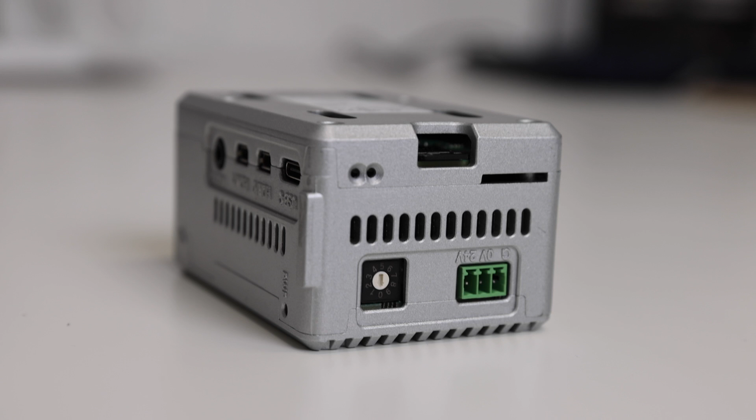On today's video, we're going to talk about a new device made by Synergy Logic, the SL-RP4. This device, despite its size, is a powerful edge computer based on the Raspberry Pi 4. Thanks to its aluminum case, the SL-RP4 can run without CPU throttling and maintain its core temperature, even at an ambient temperature of up to 50 degrees Celsius.

The SL-RP4 can be used as an edge computer to collect data, as a gateway, or even as a PLC. It comes with OpenPLC pre-installed and configured, ready to be used. On the bottom, it has a rotary switch that can be used to read configurations or parameters in your program. This rotary switch can be read using the rotary switch block on OpenPLC editor.

Using the OpenPLC runtime, you can add multiple slave devices to the SL-RP4 to control remote IOs. For our example video, I'm going to pair it up with a P1AM system from Automation Direct. We're going to use the OpenPLC editor to set the P1AM as a generic Modbus slave device, and then link it with the SL-RP4 using the slave devices module. Then we're going to upload a sample traffic lights program to the SL-RP4 and make it control the P1AM as a remote I/O device. Before we start programming our system, we first need to wire it up.

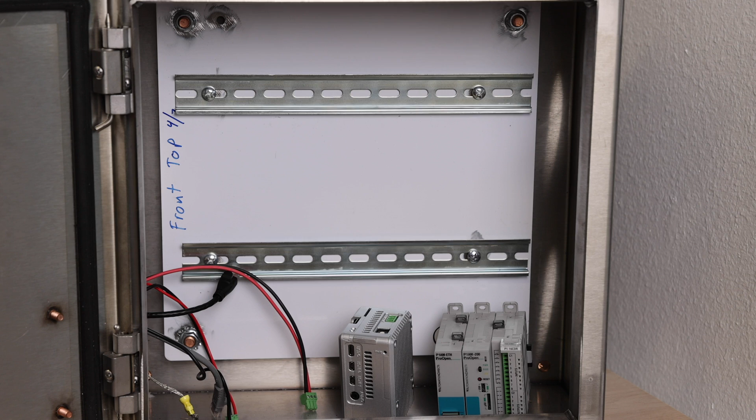So I'm going to start with the SL-RP4, power supply on the top, 24 volts, Ethernet cable on the bottom, and then I can attach it to my DIN rail. I'll do the same thing with the P1AM. Ethernet cable, programming cable, because I also need to program it, and power supply, 24 volts on the bottom. Attach it to my DIN rail. I'm ready to program my system.

Alright, now that everything is wired up and connected, the first thing I'm going to do is configure the slave device. To configure the slave device, I'm going to open up OpenPLC editor. And because this slave device is not actually a dumb slave device, it's actually a full-blown PLC, we'll have to upload a program to it and make it act as a dumb slave device. I created such a project here.

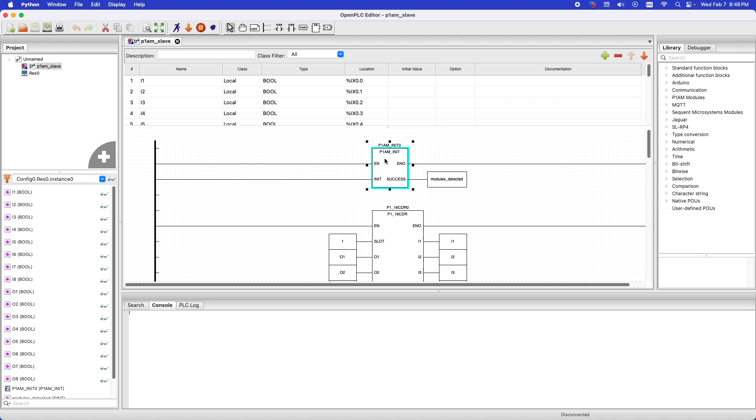It's very simple. The idea is, first I initialize all the modules. This is a P1AM, so it requires the P1AM init. And then I have this P1 16CDR block. I only have one module connected to the CPU. This module has 8 digital inputs and 8 digital outputs, so it's perfect for our example. On this program, I created 8 input variables and 8 output variables. They're all located at Modbus address locations. So I'm wiring up all these variables to the inputs and outputs of this module.

So essentially what it means is that when this device is addressed over Modbus for this particular location, I'm actually addressing that particular output on the module itself. Same thing goes for the inputs. When you're reading inputs over Modbus for that location, you're actually reading the input of the module. Very simple, just this. The program doesn't have anything else besides this. No logic, so it's not actually running any logic here. It's just acting as a dumb Modbus slave device.

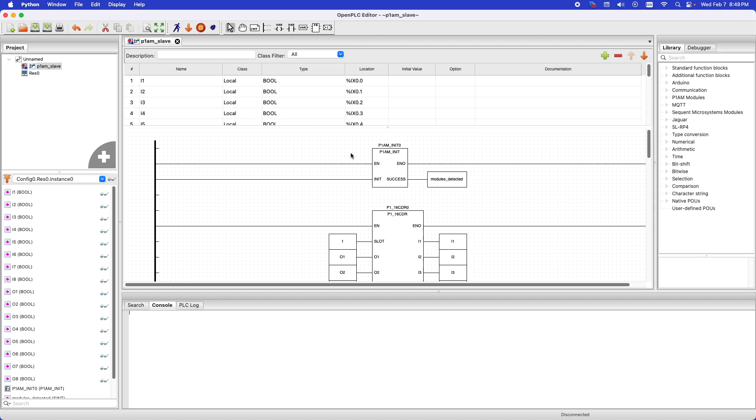So now we're going to upload that to our P1AM. So we have P1AM here. This is the installed version. This is the COM port. Everything is correct. Now, one thing is worth mentioning. The default configuration for P1AM has some GPIO pins that you can use. Those pins are on the left side of the P1AM CPU. We're not going to use those, and in fact, I'm going to remove this so that OpenPLC will not control those pins, so it won't conflict with my Modbus locations that are actually tied up to the external 16CDR module.

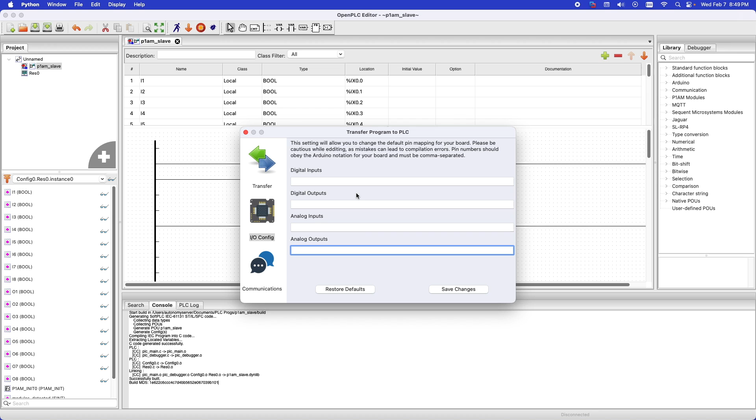And then I'm going to enable Modbus TCP on Ethernet. This is the IP address and gateway. All the IP configuration is correct. So I'm good to go. Just transfer it to the PLC now.

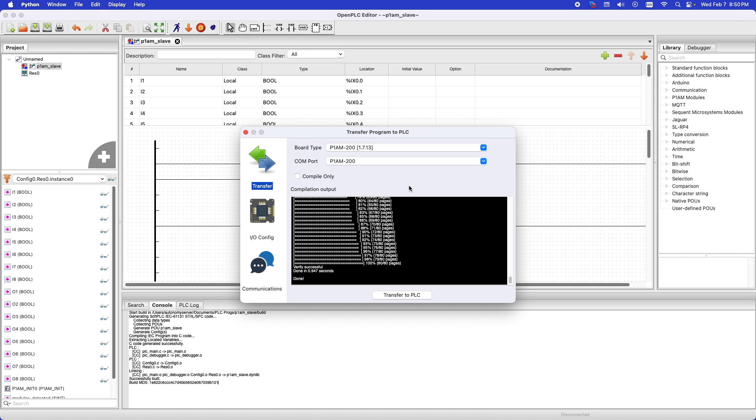All right. Now that the program has been uploaded, we're going to test it before connecting it to the SL-RP4. We're going to test it with Radzio Modbus. I have a Windows machine here running Radzio Modbus, and this is a very simple program to just connect over to Modbus devices. So I'm going to go here and hit connection settings to make sure that I have the right configuration. I'm connecting over Modbus TCP, and that's the correct IP address of the slave device I just programmed.

So I'm going to create a new data sheet here, and I'm selecting coil status, so I want to know the status of the outputs, and I'll just hit connection, connect. So I'm reading the status of the outputs. They're all turned off, and apparently everything is working just fine.

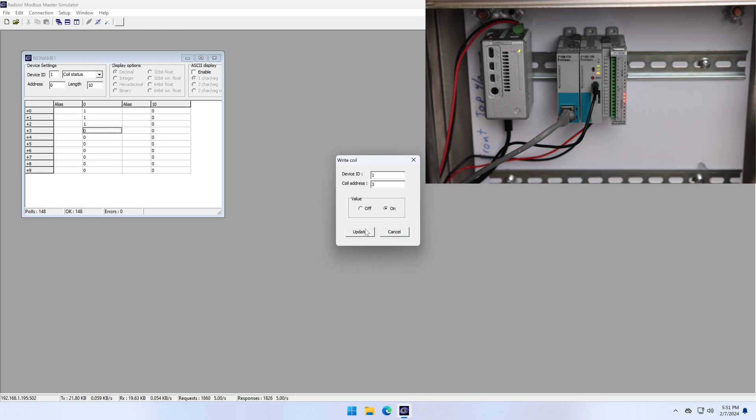If I go here and click on to change the state of an output, there you go. You hear the relay clicking. So it means that I am controlling these outputs. It's working as a Modbus slave device, right? Everything is as it should be. Okay, I'll disconnect then. Our slave device is ready to be attached to the SL-RP4.

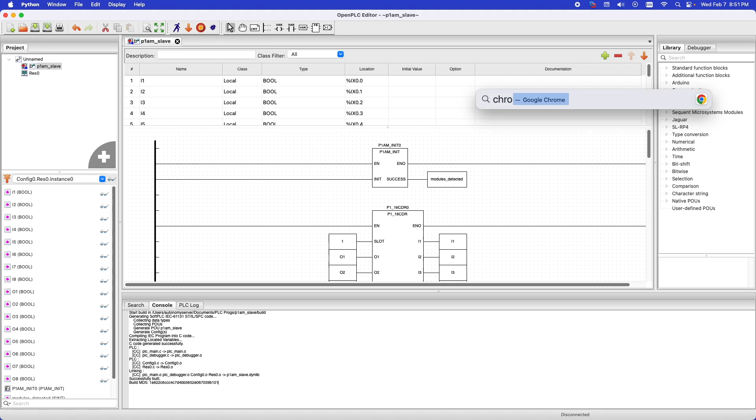Now, to attach a slave device to SL-RP4, the first thing we have to do is to actually get into the OpenPLC dashboard. So the SL-RP4 comes pre-configured with OpenPLC runtime. Everything is running and ready to go. I just need to open my browser here. I'm going to open Google Chrome, and the default host name, once you connect it to your network, for the SL-RP4 is SL-RP4. You can access it typing just slrp4.local at port 8080 on your browser.

When you hit that, you're gonna be greeted with the OpenPLC login screen. The default credentials are OpenPLC, just like always. You log in, and now it comes running a test program. It's called the SL-RP4 rotary test. The SL-RP4, as I showed you, has this little rotary switch on the back that allows you to program anything with it. You can turn it around to have specific configurations. So maybe you have a program that has different setups, and depending on where the knob is pointed to, it will run different configurations of that program, right?

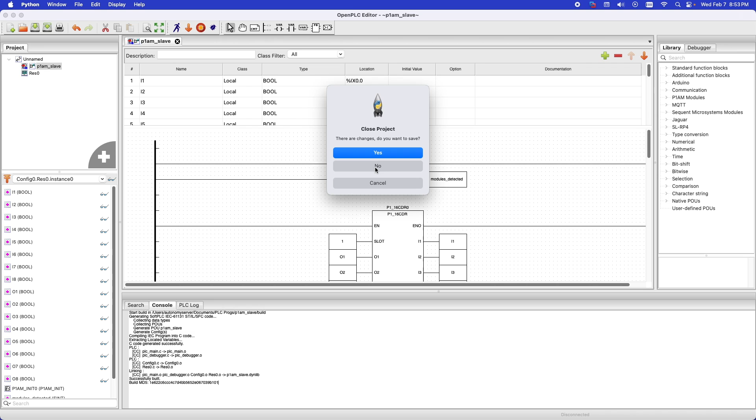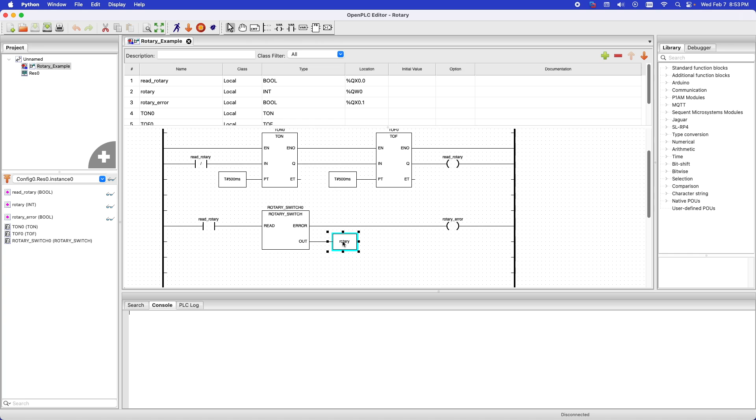So this simple program is basically just reading that rotary switch and displaying here the position of the rotary switch. It's very simple. I can even show you guys what that program looks like. It's right here on the rotary example. I won't save this, and all it does is create this 1 second blinky output, and every time this thing is true, it will call this rotary switch block to read the state of the rotary switch, report if there is any error, and if there isn't, it will output the value of that rotary switch to my rotary variable that is located at the first holding register Modbus location, right?

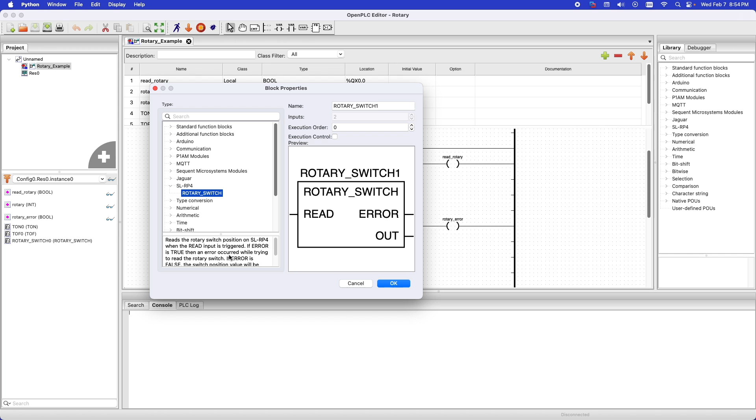Here. So you can find this block here on add block under the SL-RP4 category, and that's what it does. There's a little explanation about how the block works. So you can add this block to all your SL-RP4 programs if you want to use the rotary switch that comes with it. All right, so now we see that everything is working.

We can go back to our Google Chrome, and the first thing I'm actually going to do once I logged in is to change the username and password, because it comes with the default username and password, and I don't like that. So I'm just gonna hit users and click on the OpenPLC user, and I'm gonna change the username from OpenPLC to something else. Just for the sake of the demonstration here, I'll change it to OpenPLC demo, right? And change the password as well. And once I save changes, it will go back to the login screen, and I'll have to log in again using my new credentials. Okay, now I'm back and I'm protected because I've changed the default username and password.

The next step is to also change the host name. It comes by default with SL-RP4, and you can reach that just by typing the host name .local at port 8080. But if you have more than one SL-RP4 device in your network, this will cause a conflict. So ideally, you should change this host name to whatever you want, as long as this is a unique name for each one of the SL-RP4 units you have.

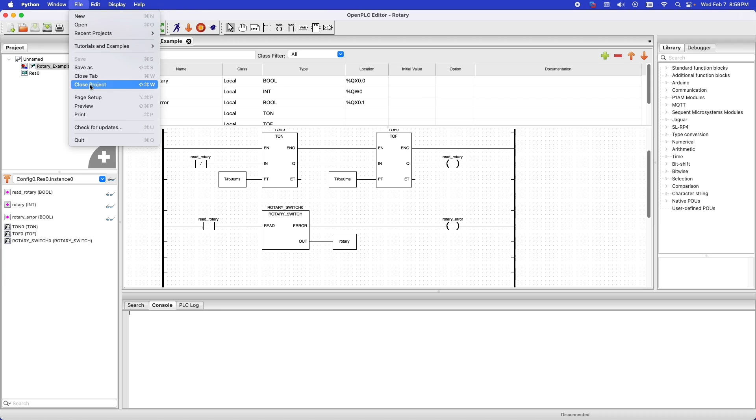Now we can go back to our OpenPLC editor and create a program for this thing. So let me just open it up here. And right now I have the rotary example. I'm gonna close this. I created another example project for this SLRP4 demo. So this is a little traffic light example. The way it works is very simple.

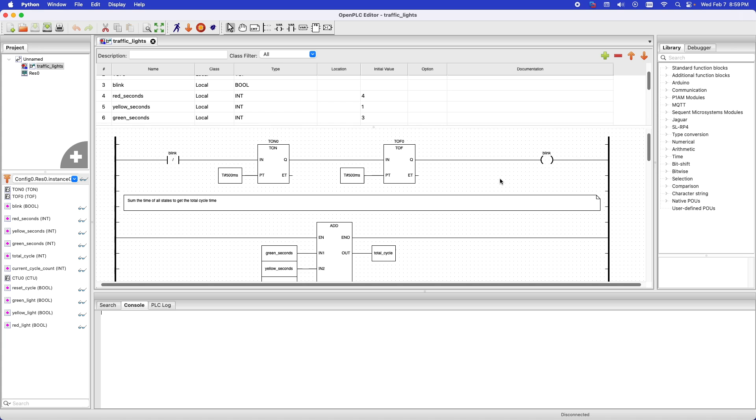I have a 1 second pulse configured here using these timers. So it's pulsing every second, right? And I have variables here configured to tell me how long I want the red, the yellow, and the green to run for. So I have the red running for 4 seconds, and the yellow for 1 second, and the green for 3 seconds. So I have a cyclic thing happening here. Every 8 seconds, it starts over.

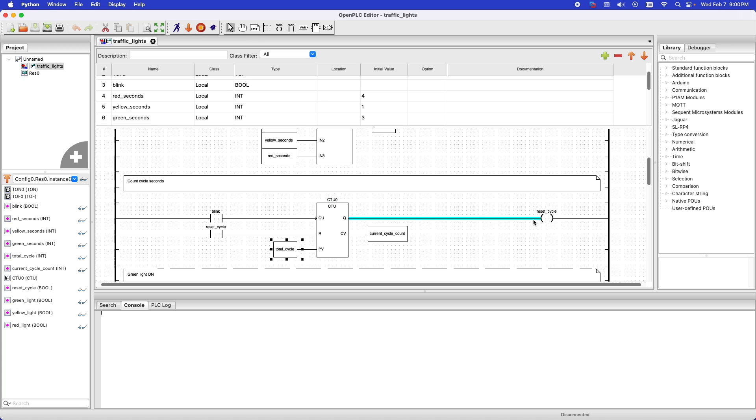So to make it happen, all I did was to add all the 3 times together to have my total cycle. And using this total cycle, I created a counter, right? This blink pulse, 1 second pulse, is hitting my counter, and the counter is counting up to the total cycle amount. Once it reaches the total cycle amount, it will reset itself, right? And it will also hold the current count value here in this current cycle count variable, right?

So I can use this to compare against different values and know if I need to turn on the red or the yellow or the green light. So this is what I'm doing here. On the green light on, I'm comparing my current cycle count with the green seconds, and I know that it must be on for 3 seconds here. That's the default value here.

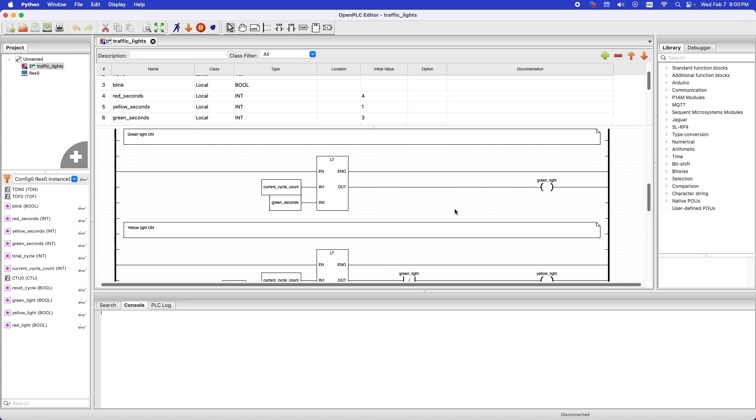So if it's less than 3, you should turn on the green light. Very simple. For the yellow light, I'm just adding the green and yellow together because, you know, I'm turning yellow after the green, right?

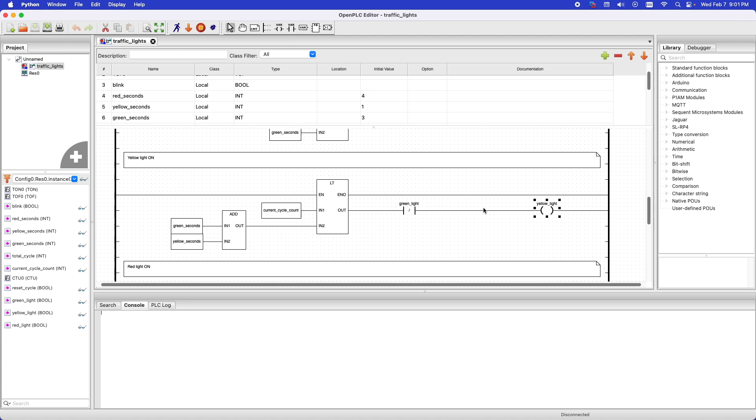So if the current cycle count is less than 4, adding these two together, and I'm not on the green light state, then I should turn on the yellow light. Finally, the red light is the easiest. If I'm not on yellow and not on green, then I should turn on the red light, right? Very simple. So let's simulate this program before we have it going to our SL-RP4.

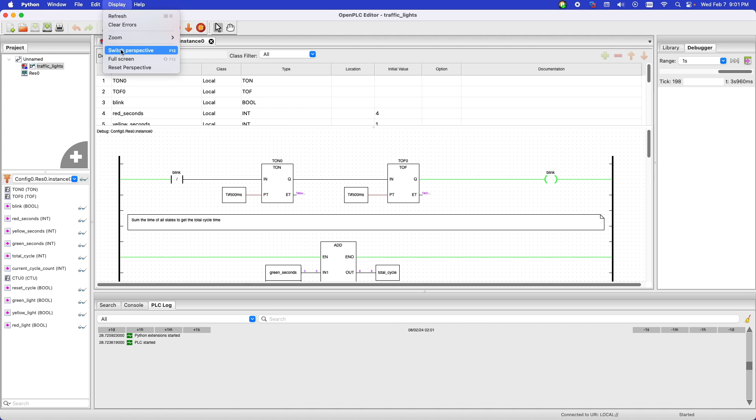I'm gonna start simulation here, and I will display in full screen so you can see it better. So this is what I was talking about. You see this 1 second pulse going every second, and then I have my full cycle calculated here. It's 8 seconds total, and then the blink is pulsing on my counter, and the counter is going up. It resets at 8 and starts over, right?

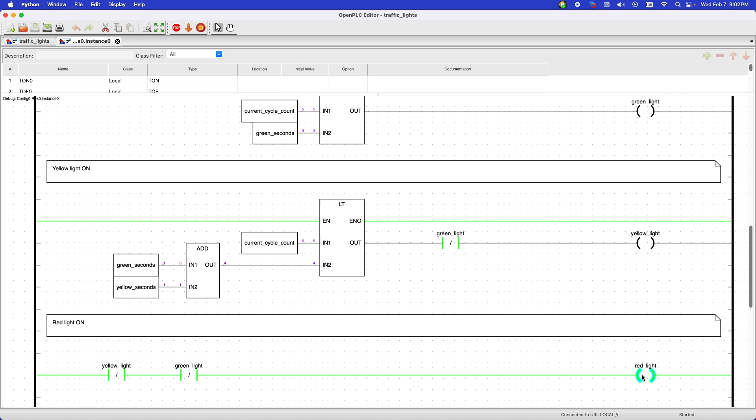And then it's comparing here if it should turn on the green, the yellow, or the red light, right? It stays 3 seconds in the green, then yellow for 1 second, and red light for 4 seconds, and then it starts over, right? Very simple. Apparently everything is working just fine. So let's upload this to our SL-RP4.

Because this thing is running on a Raspberry Pi based system, it's the Linux runtime, we'll have to program it using the generated program on the editor. Right, so I click this arrow, and I can save it in a folder. I'm just gonna replace the traffic lights that I had previously saved, and that's going to generate an ST file for me, right? I can use then this ST file to upload it to my SL-RP4.

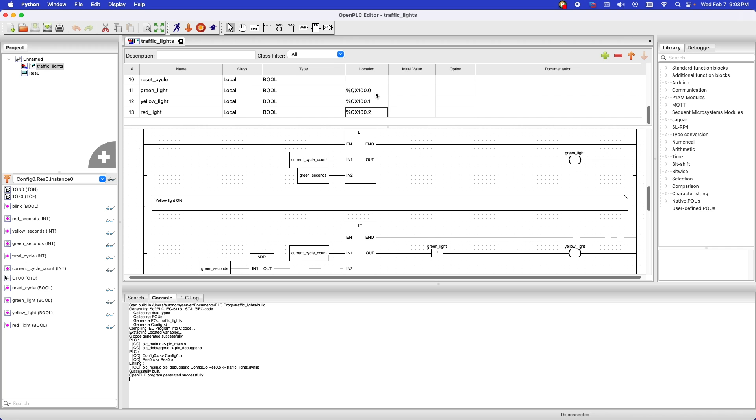One thing I didn't mention though is the addresses for my red, yellow, and green light. If you scroll over here through my variables, you'll see here that the green light is the first digital output of my slave device, and the yellow light is the second, and the red light is the third. So these three are my outputs, these are their addresses, and if you compare it with the slave device addressing here, you will see that it matches, right? So that's very important for you to map the addresses correctly, otherwise you wouldn't be addressing this slave device and your program would not work, all right?

Now I'm ready to upload it to the SL-RP4. It logged me out due to timeout. Let me log in again. All right. So I will go to Programs, and I will choose another file, and I'll go over to PLC Programs, Traffic Lights, example, Traffic Lights, there it is. So I'm just going to upload this file over here. I'm calling it Traffic Lights version 1.0, right? And this is just a little traffic light example for the SL-RP4. All right, upload that.

And done. I can go back to the dashboard, and I can start the PLC now. I can see that once I start it, it has connected successfully to my Modbus device, the P1AM, right? And everything apparently is working just fine. I can hit monitoring, and I can see that the program is running, right? And at the same time, if I compare, I can see that my P1AM is also toggling these outputs according to my program. They are in sync.

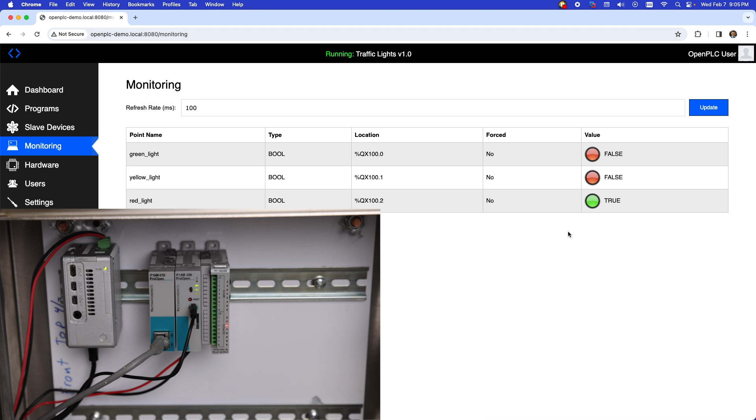And the nice thing about it is that the SL-RP4 is fully controlling the P1AM system. Even though this thing is a full-blown PLC, it's acting only as a remote slave device. For example, if I remove the Ethernet cable from the P1AM, it stops right there because it's not receiving any more commands. If I return the cable to the P1AM, it will resume the program and then continue running.